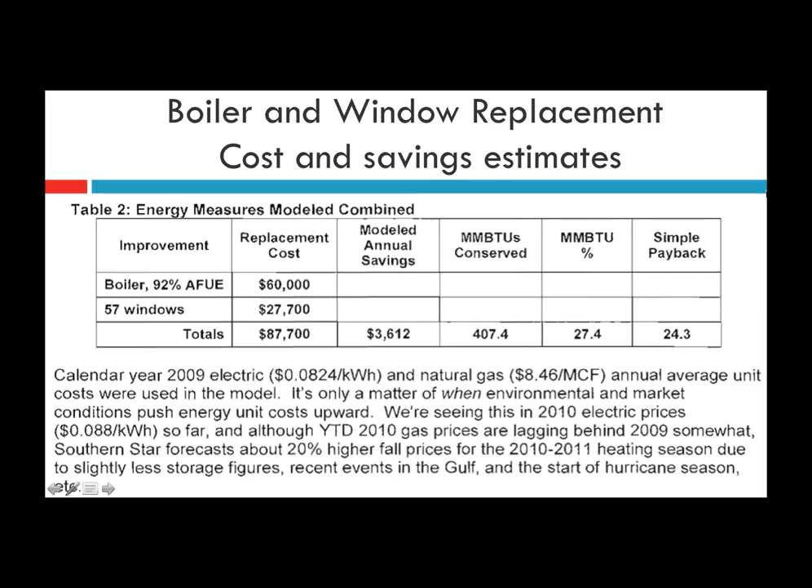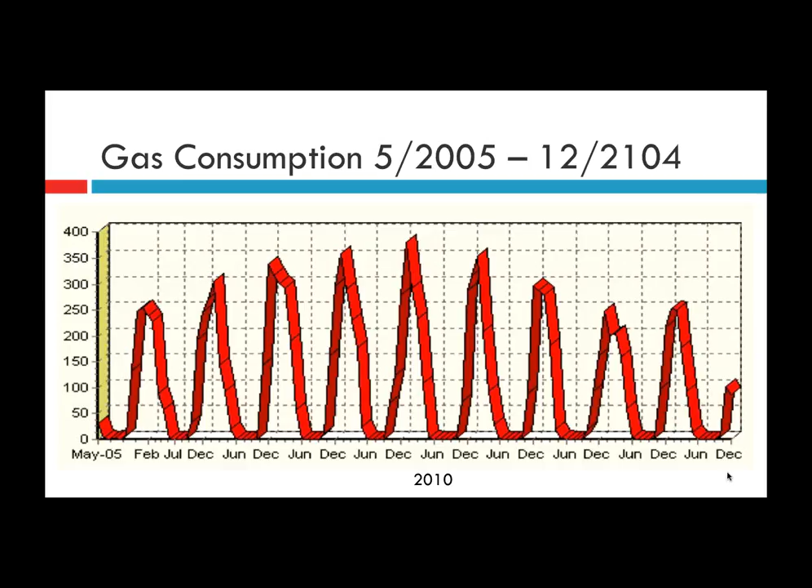There we go. I got a graph of our gas consumption, and you can see how it dwindles off as the years go by. The 2010 there at the bottom marks about the time the boiler was installed. This graph comes from a utility company. It's quite useful. The electric also shows a consistent drop over the years.

It's hard to get an exact cost savings for these projects because, as you know, there's many electrical devices throughout the plant that use much more power than the air conditioning system uses, the pumps, the clarifiers. So I have not been able to get a total cost savings, but we're seeing a constant drop in our graph. That shows me that we have made an improvement over the years to our electrical usage.

Some of the other projects we considered that I didn't have much information to make slides on was a roof insulation. Sorry about that. The roof, they wanted us to put an insulated roof in. Well, our current roof is not in good shape, but it was also not bad enough the city wanted to fund it. It's about a $25,000 project, and that would pay off in about 18 years.

The decision was made to put that in our 5-year budgeting process and to install a new roof completely, not to just put insulation up underneath the top of the current roof, and put in a poured foam roofing process at the time. That will basically kill two birds with one stone by putting a new roof up there and also the insulation.

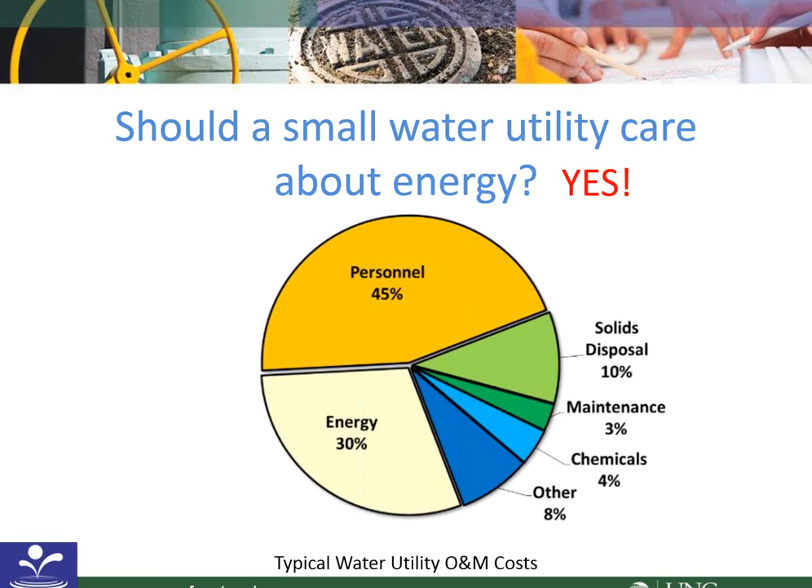And we'll come back to their model in just a moment. But just to review for folks who may not have tuned into the first or second webinars or have encountered us at all yet through our energy management work, should a small water utility care about energy? I would say yes. This is based on one study of your variable costs, your typical water utility's O&M costs, and energy tends to be the largest controllable slice of that pie.

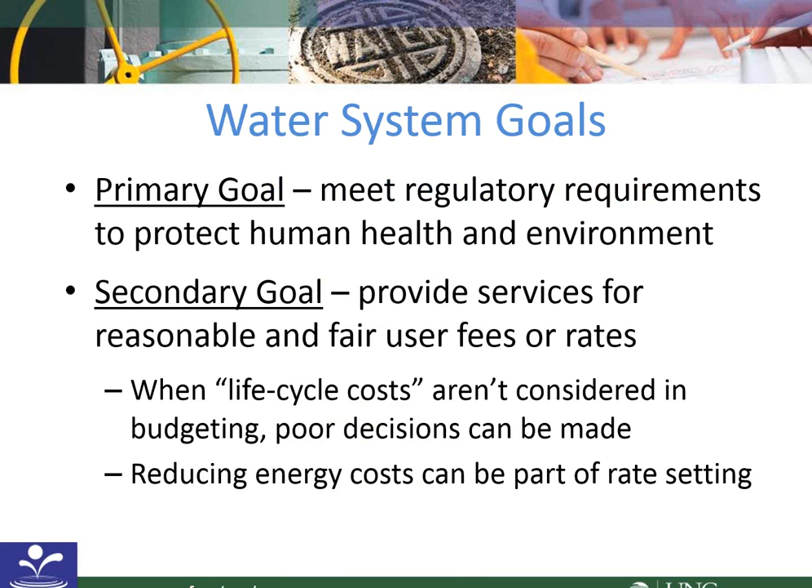And vis-a-vis the primary and secondary goals that water utilities across the country have to meet, number two, providing services for reasonable and fair user fees or rates. Well, your energy costs go into your overall cost structure and therefore have an impact on rate setting and fee setting. So it's definitely something that I think all water systems should look into.

So just a little more on those lines. According to a study in the AWWA's journal by Regnier and Winters, 2 trillion gallons of water are pumped each year by small water systems, using approximately $1 billion worth of electricity every year. So if all of them collectively could only save 1% on their electric costs, that would be $10 million, or 10% savings, which may be very, very doable. That would be $100 million a year across all of you around the country.

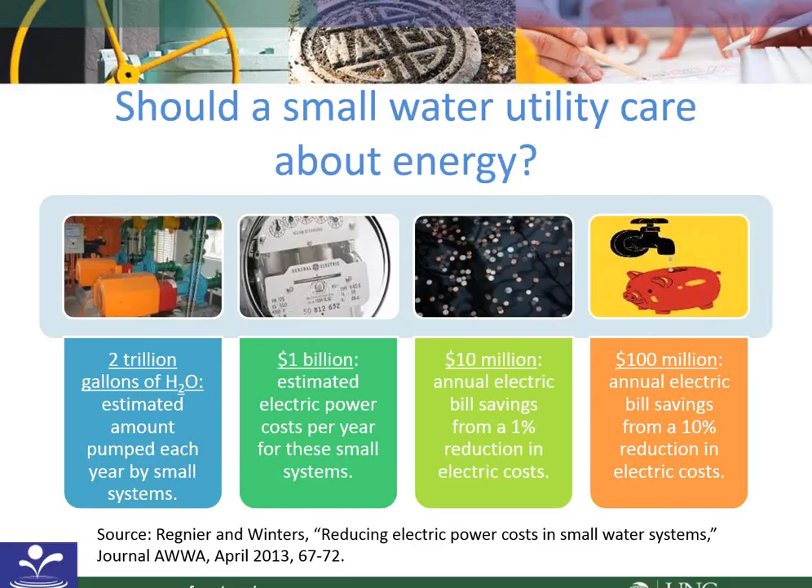Can you do it? Definitely. All of you are going to have different kinds of situations, different kinds of utilities, projects you have already done or have not yet done. But depending on what kind of system you have, these are some examples of things you might look at. Working with your pumps, for most of you, I know the biggest energy charge is for pumping. And so do you want to put variable speed drives on your existing pumps or premium efficiency motors to replace your current motors?

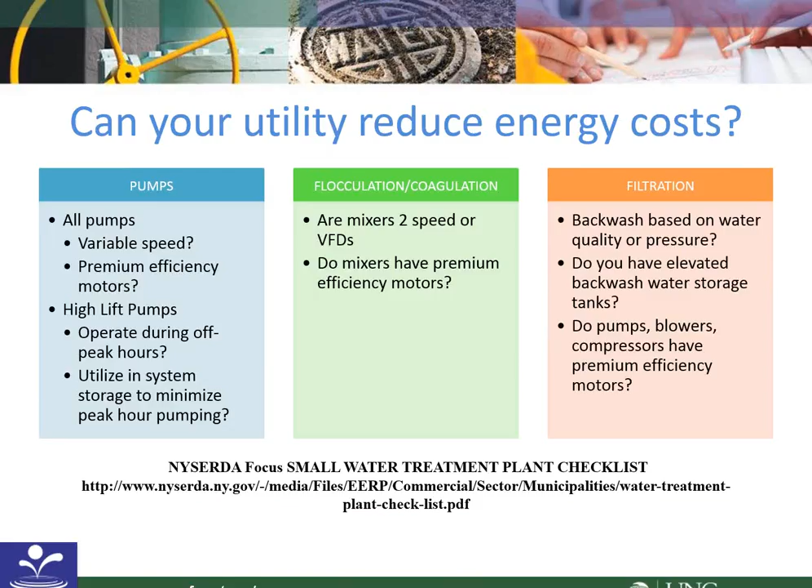Optimize the high lift pumps, work on the flocculation coagulation system, work on the filtration. I'm going to go past this a little quickly now so that we manage to get to the rest of the material. Also, there's possibilities to save energy on your disinfection system. If you have a UV system, is it operating in an energy efficient manner? You can look at the energy management of your residual management and other areas too. If you have HVAC equipment, if you have lighting,

for all of your electricity, if you're on an electric rate schedule that includes demand charges for your kilowatts of demand, then some load shedding or load shifting to off-peak times may help to reduce charges there.

And I should add that in all of this, our webinars tap into a broader amount of knowledge that we have on energy management, and if there's more that you want, after today's webinar, after the end of the series, you can contact us if you're a small system, and if you have a particular problem that we can help you with, there'll be an opportunity for some direct technical assistance. We'll talk about that later in the hour.

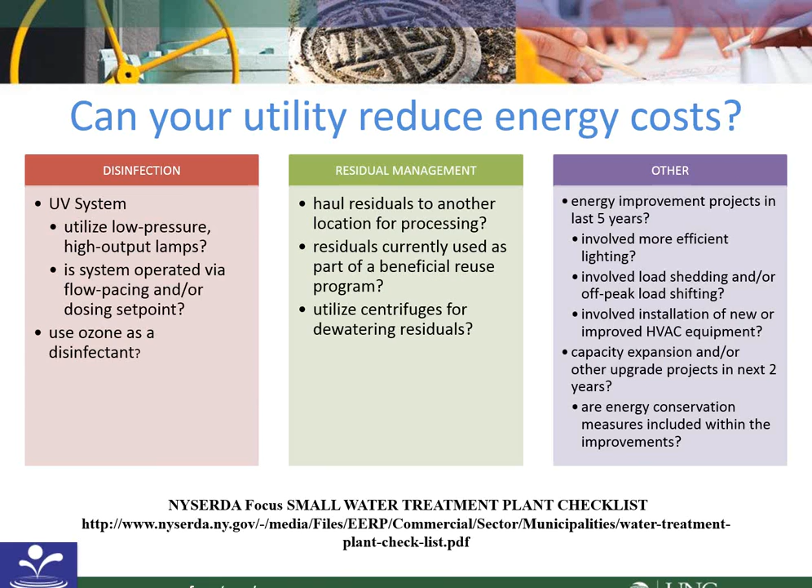So this 5th step is on prioritizing opportunities for implementation. We'll talk a little bit about project economics, then prioritizing more broadly, and we'll show you a brief exercise that you can do offline. So when you're prioritizing your opportunities for energy efficiency, you'll want to have projects that you've selected carefully, evaluated them carefully, and you'll want to identify a consistent method to compare and rank opportunities, considering both monetary factors and non-monetary factors.

Naturally, money is a big piece of it, isn't it? So you saw on at least one of Steve's slides where he calculated the payback periods. And for any of you who are not already well versed in this, it's basically taking the cost of the project and dividing it by the savings per year, and then the number you get should be the number of years it takes to pay for itself, 3.5, 24.3, 0.5, whatever it is. So this is not taking into account the time value of money, which we'll talk about in just a moment. It's just looking at dollars as all being the same as each other, and how many years does it take to pay back.

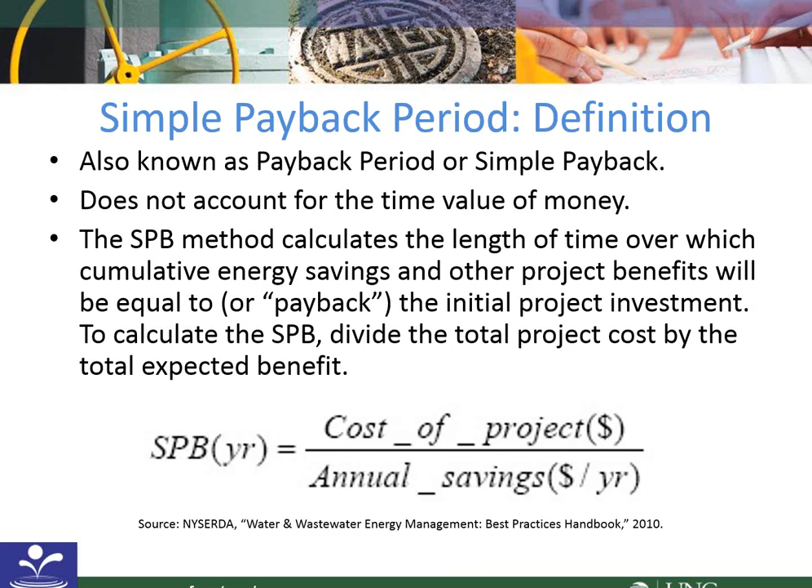So an example, let's say you've got a project A you're evaluating, whether to replace pump motors with more efficient models. The new pump motors would cost you a total of $200,000. If you put them in, they're going to reduce your energy costs by $100,000 a year and last for 5 years before you need another one. These are all made-up numbers, by the way.

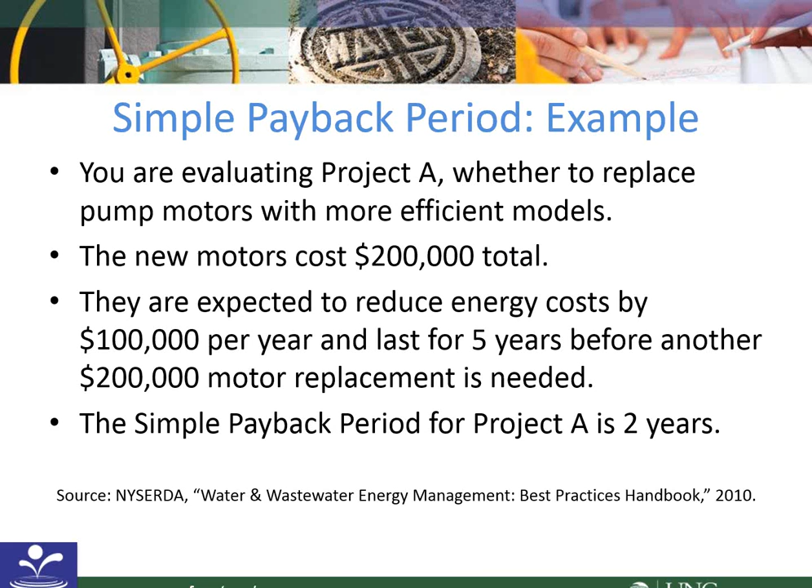And so the simple payback period for Project A is 2 years. And then after that, you start getting the gravy for at least 3 more years after that before these imaginary pump motors need replacing.

But what if it was scheduled on your projections to go up from $9,000 a year to $12,000 a year, but you put into place some measures that bent that curve down a bit, so it only went up from 9 to 10. Well, some people might say, well, that's not a savings, but you avoided some costs, so it's still a kind of savings. It's just important to be able to communicate this clearly to folks when you're drawing up the projects and implementing them and wrapping them up.

A life cycle cost analysis looks at not only the initial cost of the project, but all of its costs and benefits over the lifetime of the project. And that typically will include some time value of money calculation. And you'll want to be looking at volatility of cost when you do your life cycle cost analysis, and any operations and maintenance costs that are related to the project. So maybe you replace an incandescent light with an LED light, and now it's going to last years and years longer. So not only are you going to save on your electric costs, but you may cut your maintenance costs down as well.

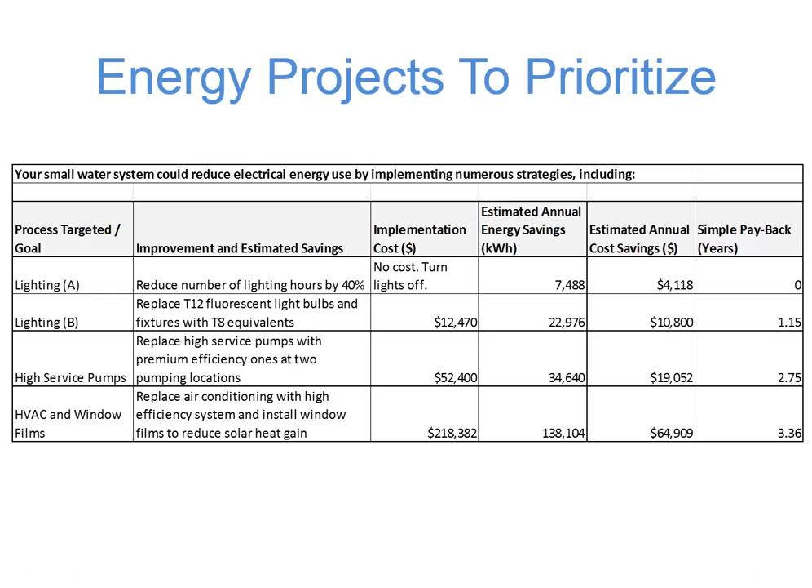With the high service pumps, replacing high service pumps with premium efficiency ones at 2 pumping locations. And this is costing you over 50 grand and will pay for itself in just under 3 years. The replacing your air conditioning with a high efficiency system and installing the window films so that you don't have to run the AC as much, that's going to cost you over 218 grand there and pay for itself in over 3 years. So taking these 4 imaginary projects, you can try and hold that in your mind. Where might they go on the grid that we were just looking at?

So I would say that different people will come to different conclusions, but I would put lighting A in the quick hits. It's free, but only saves you a little bit. Then going to the other extreme, because I think the easiest ones for me to peg on this grid are the first one and the last one. So going to the other extreme, the HVAC and window films, I'd say that's a capital project. I mean, it costs over 200 grand, and it's going to take a few years to pay for itself.

And then where do we fit in lighting B and the high service pumps? Well, that gets more debatable. My take on it earlier today was lighting B is still a quick hit, but you see it moves up the cost axis some, as well as moving to the right some on the energy savings because they're bigger.

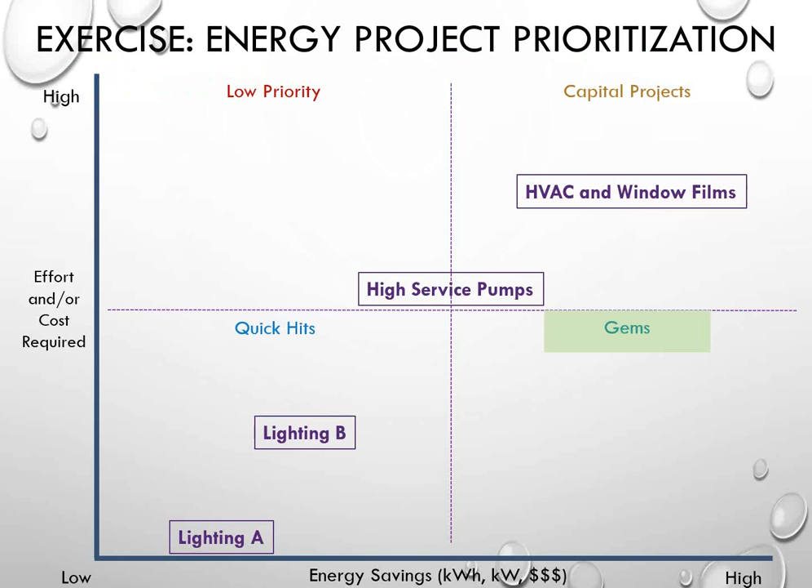You see it's more than twice as much energy savings. And then finally, the high service pumps, it's debatable where they go, so I just kind of plop them right down in the middle. So if you find this helpful, I recommend this exercise to you, and you could just print out this slide from the slide deck once you have it.

So some keys to success on prioritizing are converting all energy efficiency opportunities and their characteristics to a common denominator, and money is one of the good ones to look at, though as we said before, there are other non-monetary things to evaluate. Look at the ancillary benefits and the ancillary costs when possible. If you have the time, and I think it's good to do this, test the sensitivity of your results.

So for example, what if our calculations are based on electric rates today, but they go down a bit, which actually has been known to happen occasionally. Probably some of you are laughing out there, but I have seen it happen. Of course, you can also test how does it look if the rates go up, because it'll probably look even more attractive to you. And you can test the sensitivity of other variables in your analysis as well. You want to make sure that the final results make sense in terms of your utility's capabilities, which goes to your ability to implement it, which is our next topic here.

So we'll have to go a little fast through the implementation section, but I do want to cover it, because it's the sixth step in the NYSERDA model, and we're breaking it down into 4 pieces here. The first step, defining your project objectives and targets. Second, identifying the tasks necessary to meet your project objectives. Third, identifying changes to any SOPs, standard operating procedures, and to your process control. And step 4, determining project time frame and resource allocation.

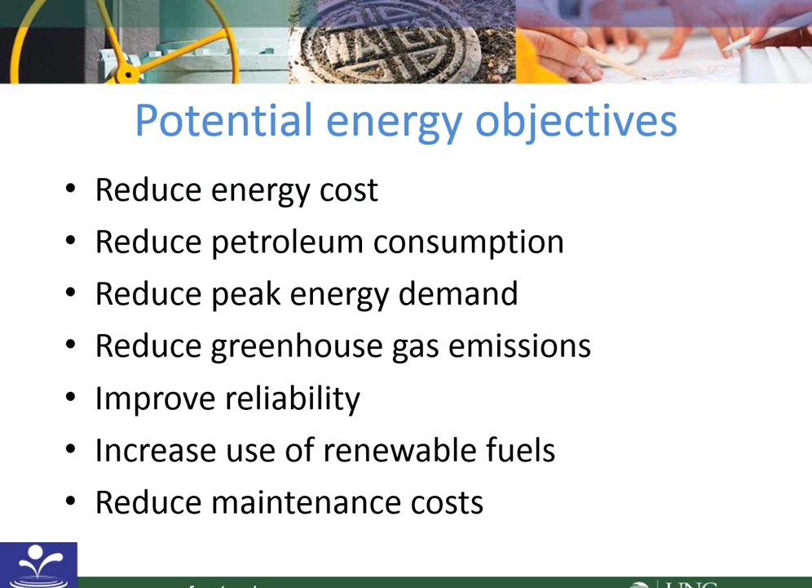And so we got an imaginary facility, XYZ. They have prioritized, their top project's going to be to replace their existing high-pressure sodium lights with LEDs. So what are some possible objectives of this improvement? Well, probably reducing energy costs, of course. But they may also be interested in reducing maintenance costs, because LEDs tend to last for a long time, don't tend to take a lot of maintenance, and so reliability might be an issue.

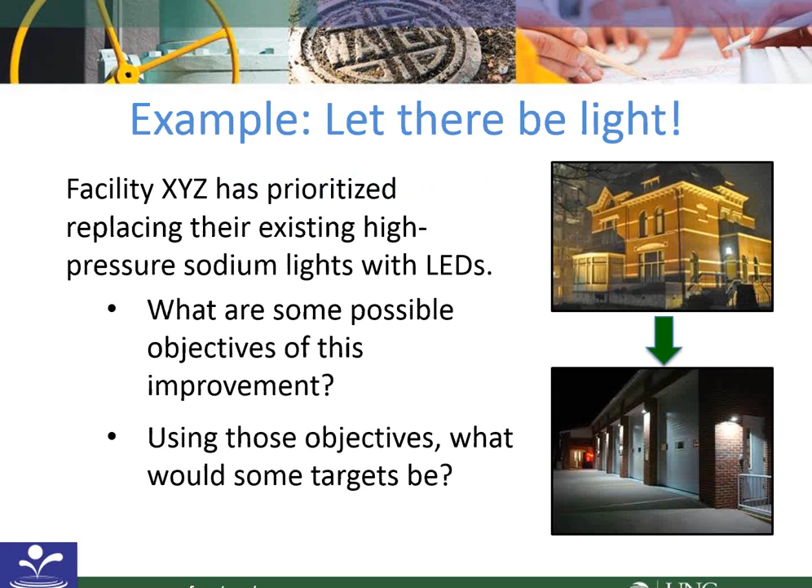What would some of the targets be, the performance targets? Very likely you're going to be looking at your ability to track and measure the progress there and be able to show that the savings is happening and the project was worth it, among other things. So step 2, identifying the tasks necessary to meet your objective. You'll want to identify the individual tasks underneath your project, the mini goals that will get you from here to there. Step 3, which we're going to divide into 2 parts here, and I'm going to have to wrap up pretty soon on the implementation section here.

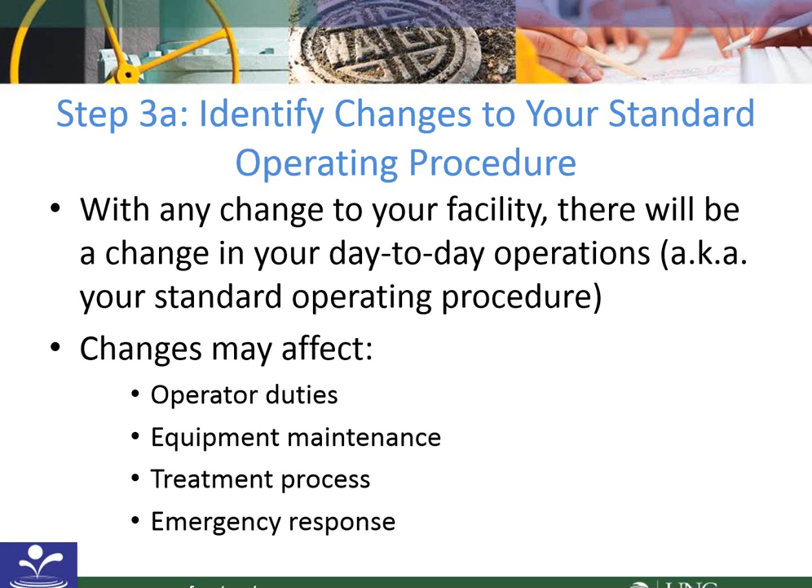So essentially, any changes that you're doing here to your standard operating procedure, operator duties, equipment maintenance, treatment processes, emergency response, you'll want to take that into account and plan for that. As far as your process control goes, does your facility use automation? And if so, are you going to have to reprogram something for this?

So if you're a wastewater treatment plant, say, and you're changing out the frequency with which you run your blowers, is it tied into your dissolved oxygen meter properly, so that you're still running them often enough to maintain the proper levels? And are people trained in what they need to do?

And step 4, determining project time frame and resource allocation. How long will it take for the tasks to be completed? Who's going to be responsible for them? How much time will that person have to spend working on it? How much will it cost to implement it? So summing that up for the LEDs: staff, timeline, estimated time, estimated costs.

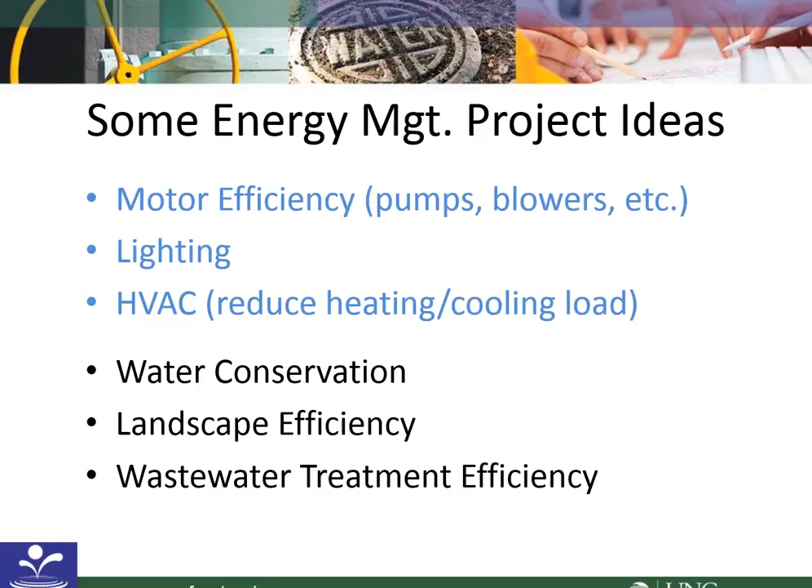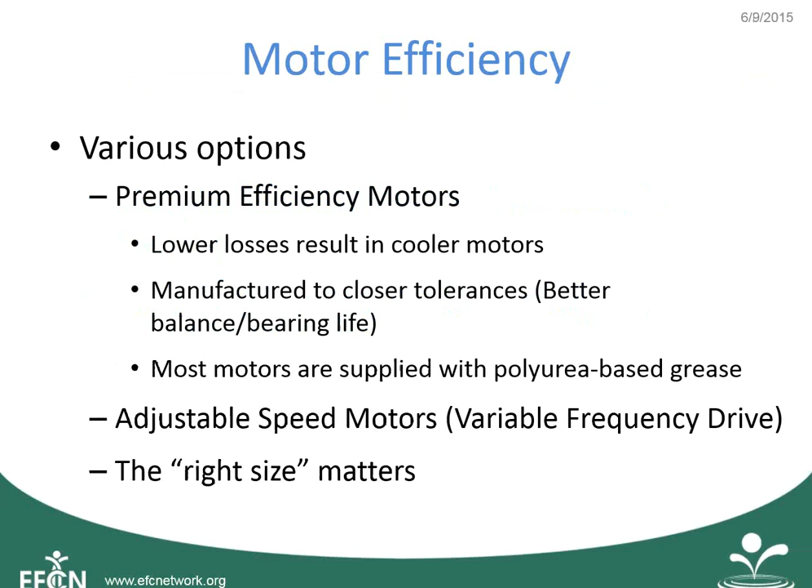So all of you probably have got some pumps. Even if you're a purchase-only system, you've got some pumps. And those pumps have got motors, and you may want to see if they're the right size or not. Do they need to be smaller or larger before you even look at changing out the motors or putting VFDs on the motors?

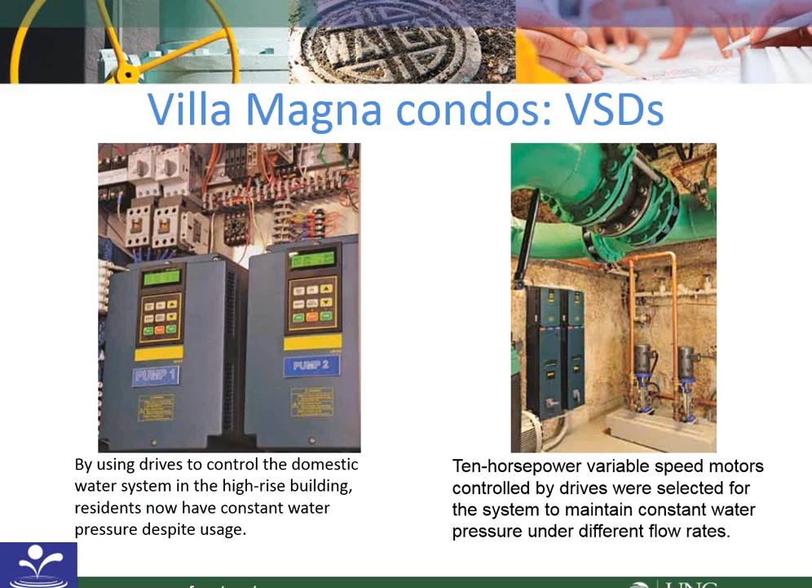So this condo complex in Highland Beach, Florida, they are a drinking water system, and they put on variable speed drives, variable frequency drives, same thing. You can see pictures of them here. And they were able to also install solar panels, heat pumps, do energy efficient lighting. They went to town on their facility, and they ended up saving about $2,000 per month on their water bill because they're an end user of water, a different kind of water system from a local government system. And they've saved $24,000 on electricity.

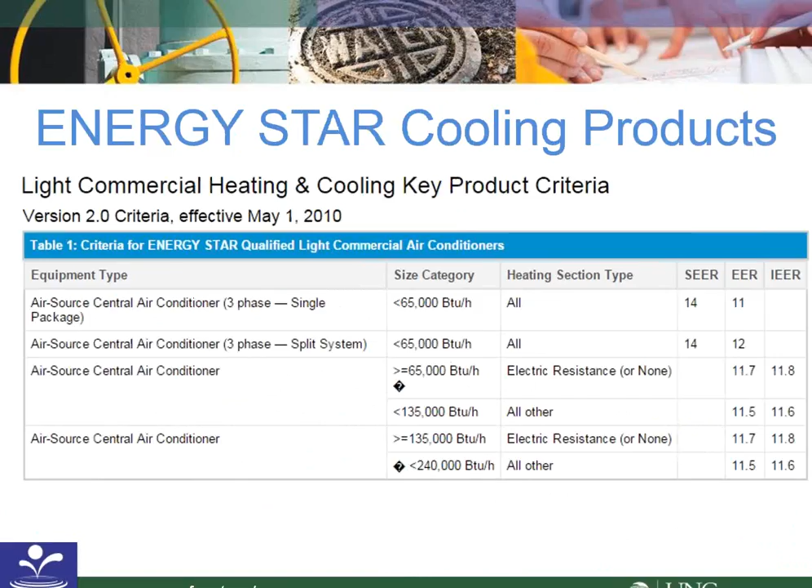And I've got a question for you, Steve, and that is, when you were looking at projects and prioritizing projects like the ones you described there in Chanute, Kansas, did you ever look at doing retro commissioning of any of your equipment there, where engineers come in and basically give them a tune-up? Well, not totally. Our largest motor is 100 horsepower, and having it rebuilt, if I'm taking that right, compared to replacing it, we did do gearboxes, put new bearings in them, things like that. But on the electrical side, no, we never did that.

Okay. And here's another question that I'd like to direct to you, Steve, which is, from your experience, how much variation in energy efficiency for motors currently available exists? Is it small? Is it considerable? Does it depend? It depends on the size of the motor. As far as I understand, I'm not a real big motor guy. The biggest difference I saw was the number of hours the motor ran. If you had a motor that ran 24/7, your savings could be considerable.